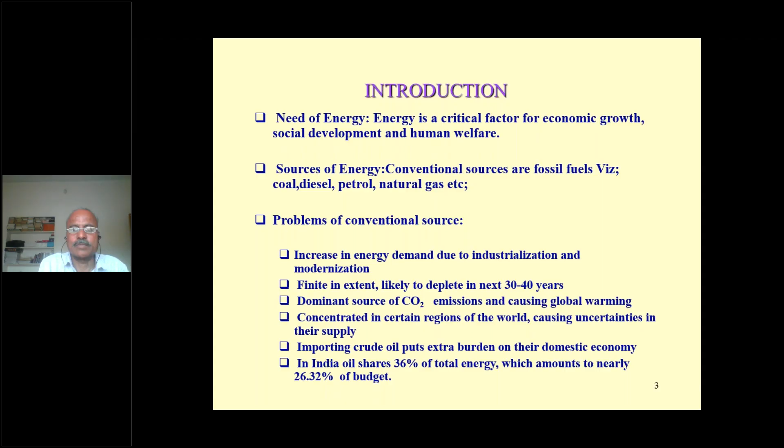The solution for this is to develop suitable alternate liquid fuels of bio origin. To develop these liquid fuels, a considerable amount of work has already been done in this field. Among them, the first one is alcohol, methanol and ethanol, which can be used as alternate fuels. These can be mixed with either diesel or petrol, and we can use them. But the problem with alcohol is that it emits toxic aldehydes and ketones.

Another is biomass and biogas, and it depends on green energy. Another green energy is vegetable oils. Vegetable oils, in the sense, the oils which are extracted from oil vegetable seeds, can be used as alternate fuels. Among these, the first to experiment were Barsic and Humake, who used untreated vegetable oils, peanut oil, and many other oils. They used them and tested them on the engine successfully.

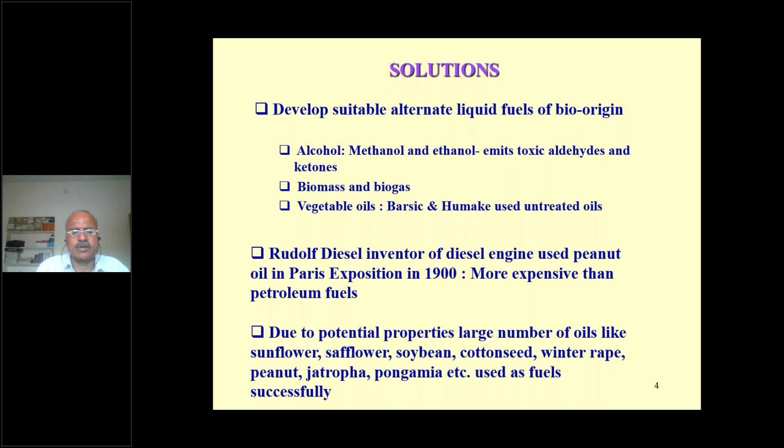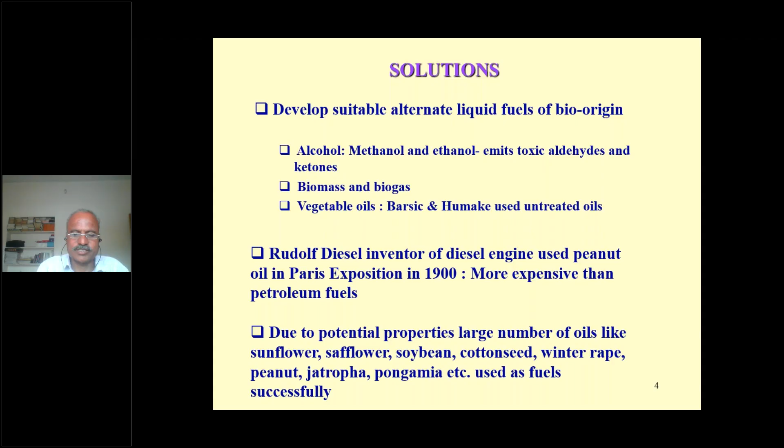And if you go way back to the inventor of the diesel engine, Rudolf Diesel, he used peanut oil in the Paris exposition in 1900. At that time it was actually more expensive than petroleum fuel, but his first exhibit was done using peanut oil. These vegetable oils have very potential properties; oils like sunflower, safflower, soybean, cottonseed, winter rape, peanut, jatropha, pongamia, etc., have been used as fuels successfully.

Historical background. As I already said, Rudolf Diesel in 1912 at the Engineering Society, St. Louis, Missouri, used this and presented it. In 1956, the USDA Research Service examined 8000 such species for oil seeds; several hundred undeveloped species contain more than 40% oil. In 1981, vegetable oil field tests were done on 5 different vehicles in Brazil, and the common things seen with the use of these vegetable oils are carbon deposit buildup, nozzle clogging, poor durability, sticking of the piston rings, and lower thermal efficiency. These are the problems that occurred while using vegetable oils.

To avoid this, the oil shall be converted into biodiesel. It means whatever fats are there in the vegetable oils shall be removed, and the vegetable oil after removing the fats is called biodiesel or esterified oil. Biodiesel is made from neat vegetable oil by transesterification. Using this transesterification process, we can convert vegetable oil into its respective biodiesel. Other methods are dilution, microemulsification, and pyrolysis. These are the different methods by which they can be converted into biodiesel.

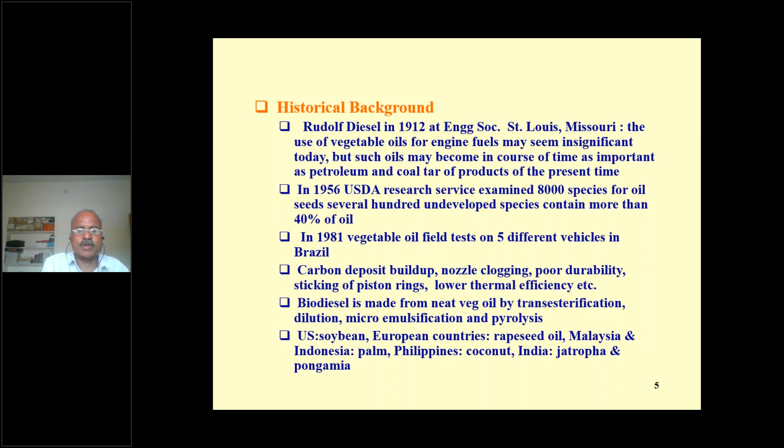In the US soybean, in European countries rapeseed oil, in Malaysia and Indonesia palm oil, in the Philippines coconut, and in India jatropha and pongamia are popular vegetable oils. India is a major oil seeds producer in the world. In the 10th plan, the Government of India outlined 5 million hectares for jatropha. They identified 200 districts in 9 states and rupees 1,496 crores to create 127.6 million person-days of work.

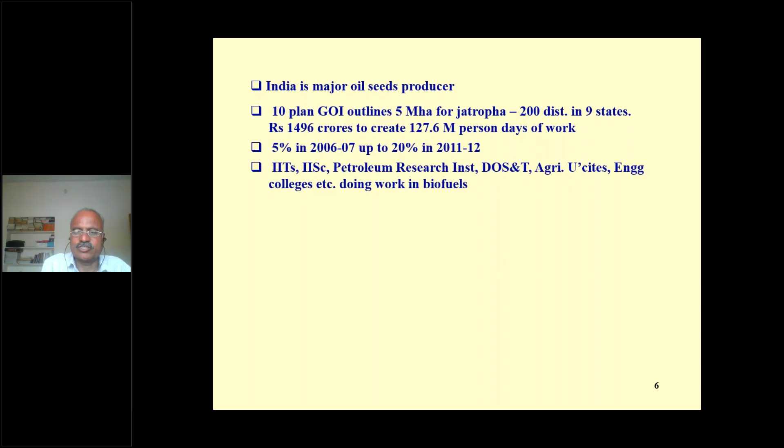In 2011-12, 5 to 20% biodiesel was used, and now the percentage of biodiesel used has increased. In India, many IITs, IISc, petroleum research institutes, the Department of Science and Technology, agricultural universities, engineering colleges, etc., are doing work on these biofuels.

Vegetable oils. Vegetable oils and fats are water insoluble hydrophobic substances composed of fatty esters and glycerol. Carbon chain length and number of unsaturated bonds vary. Triglyceride molecular weight is 800 to 900, 4 times larger than typical diesel. Oxygen molecules are present in the vegetable oil. Vegetable oils have high viscosity and density and low volatility and calorific value. This is one of the reasons these vegetable oils cannot be used directly, because of very high viscosity.

The cetane number of vegetable oil is from 35 to 45. High carbon residue, high flash point. Having a higher flash point, 220 to 285 degrees Celsius, is an advantage, since the transportation fire hazard is less. The calorific value of vegetable oil is 88 to 94% of diesel, and it has low sulfur content. This is one of the advantages of these oils.

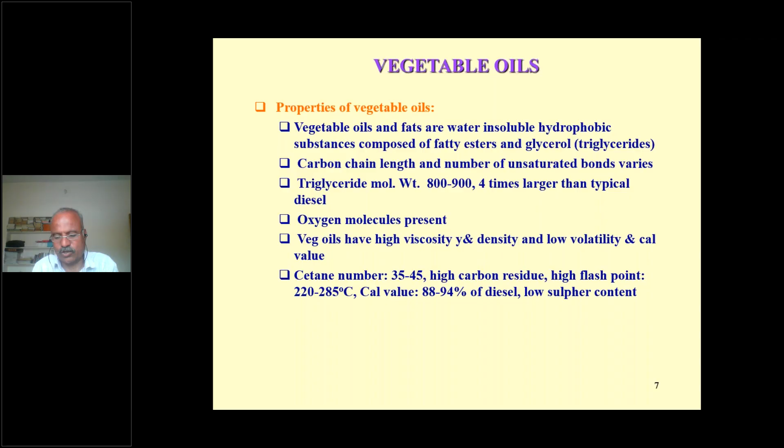But the problem with these oils is that diesel has a chain length of 11 to 13, while vegetable oil has 18, a polystructure, and high viscosity. The problems associated with using neat vegetable oil directly are nozzle choking, engine deposits, ring sticking, scuffing of the engine cylinder liner, injection nozzle failure, lube oil dilution, etc. Brake thermal efficiency is lower, brake specific fuel consumption is higher, and exhaust emissions, smoke, carbon monoxide, and unburnt hydrocarbons are higher. Reasons: large droplet sizes, low volatility, short penetration, chemical properties.

Then we actually need modification of these oils. Modification is done by transesterification, cracking or pyrolysis, and hydrogenation to reduce polymerization. Among these, transesterification is the most popular method, where the vegetable oil is directly converted into biodiesel.

And while doing experimentation, or if you are doing PhD research work in the field of biodiesels, what are the standards we use? IS 1448 standards are used for the measurement of their properties. For example, a hydrometer is used for density, a bomb calorimeter for determination of calorific value, a Redwood viscometer for viscosity, and Abel's apparatus for flash point and fire point, and all these conform to IS 1448.

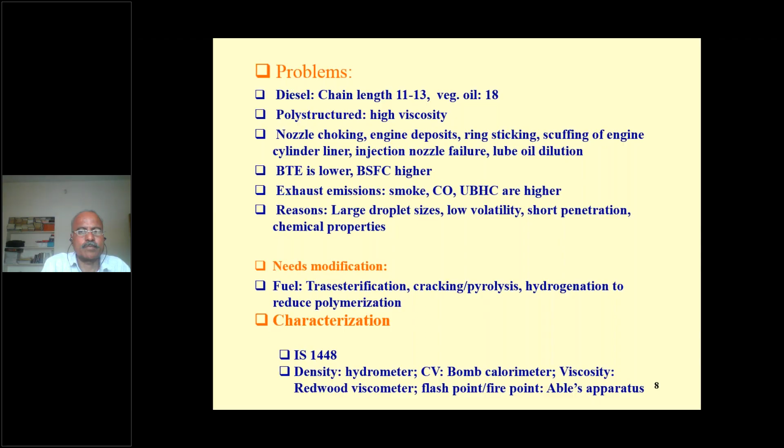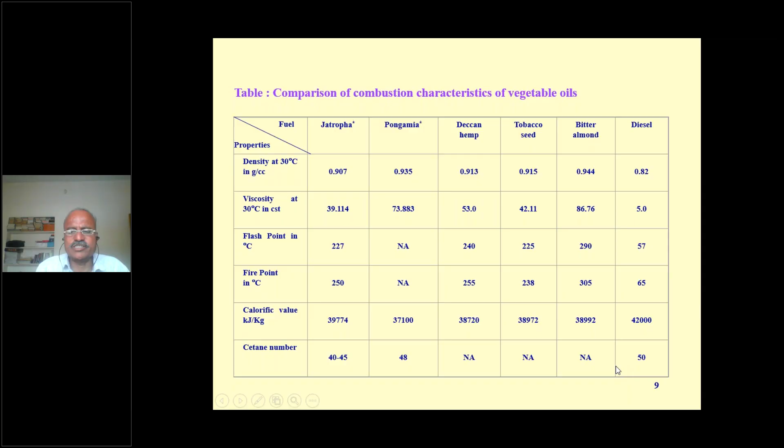We need a viscosity of around 5, but if you look at this, it is 7 to 8 times greater than diesel for all vegetable oils. Flash point is 227 versus 57 for diesel. The fire point is 65, while all these are nearly 250, on average 200 degrees Celsius. Calorific value of diesel is 42,000 kilojoules per kg, and these have a lower calorific value, around 85 to 88 percent. Cetane number is 50, and for these it is 45, 48, 45, 40. These are the ranges we have specified.

Then we have to test to determine the performance of all these oils on an engine. For the sample, I have taken up Deccan hemp oil. Deccan hemp is well grown in the region of Hyderabad, Karnataka, North Karnataka. Deccan hemp is more popular, and it is a shrub. It is also used as a vegetable. And in Kannada they call it pundi. This Deccan hemp oil we have used for investigation.

The engine used is a Kirloskar oil engine TV-SR2, a naturally aspirated single cylinder direct injection diesel engine, with rated power of 3.68 kilowatt. The speed is 1500 RPM. All the other specifications are mentioned here.

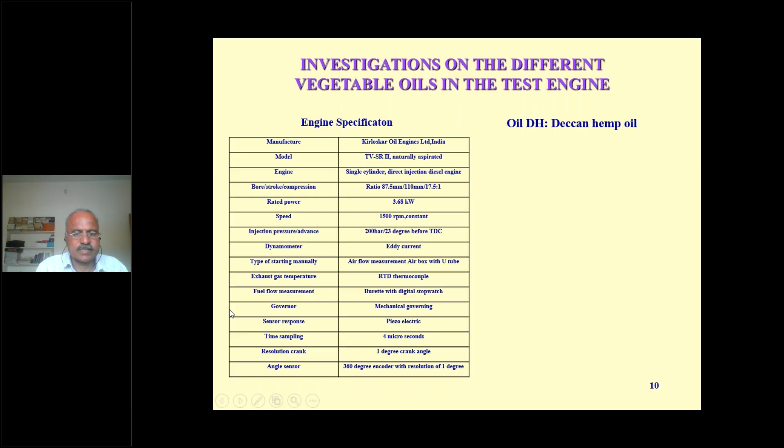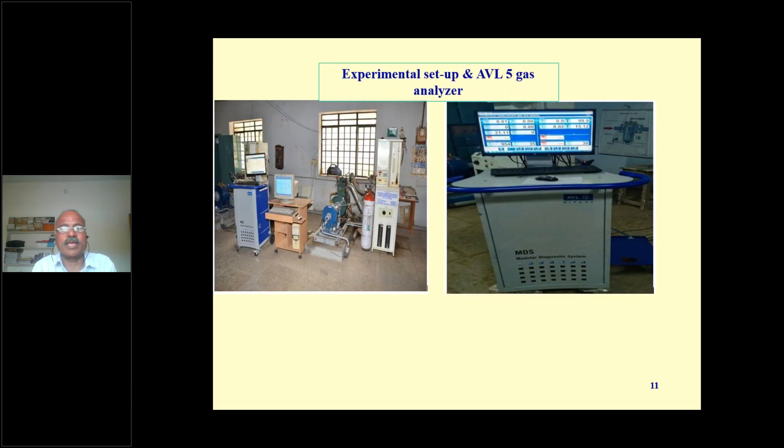Experimental setup. This is our experimental setup, and this is a 5-gas analyzer, AVL 5-gas analyzer. This is available in our laboratory of internal combustion engineering, and we procured it under TEQIP, the second phase. It measures all 5 gases, and carbon dioxide is also included. The cost of this equipment is 15 lakhs. AVL 5-gas analyzer.

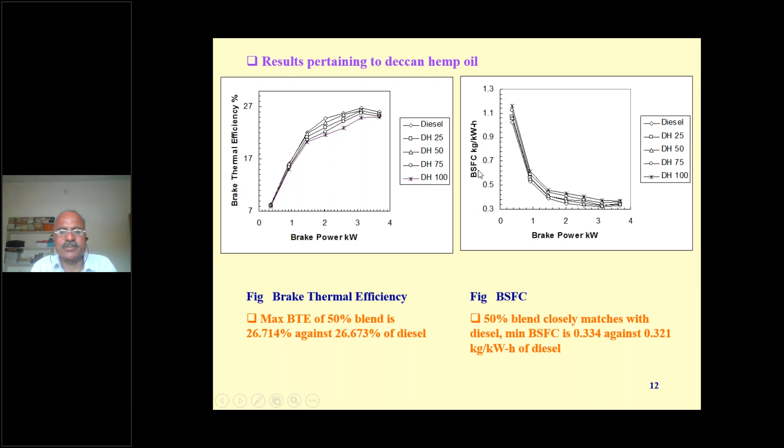Another is the brake specific energy consumption. Here actually we have gone to the brake specific fuel consumption. This is the quantity in kg per kilowatt hour, and kg per kilowatt hour keeps on changing because of the density difference of the vegetable oils compared to the diesel.

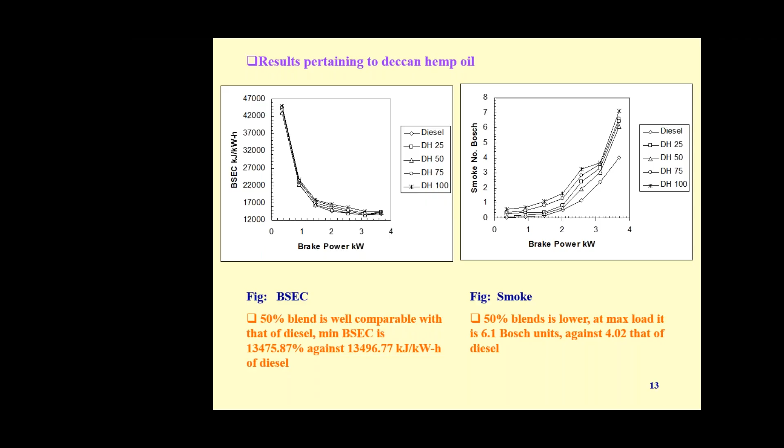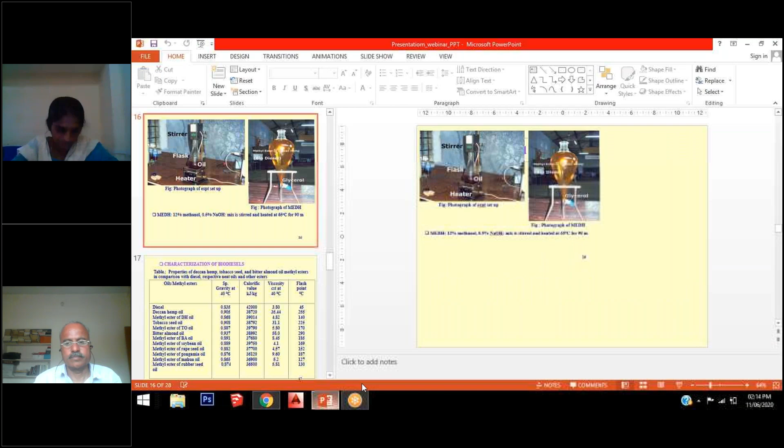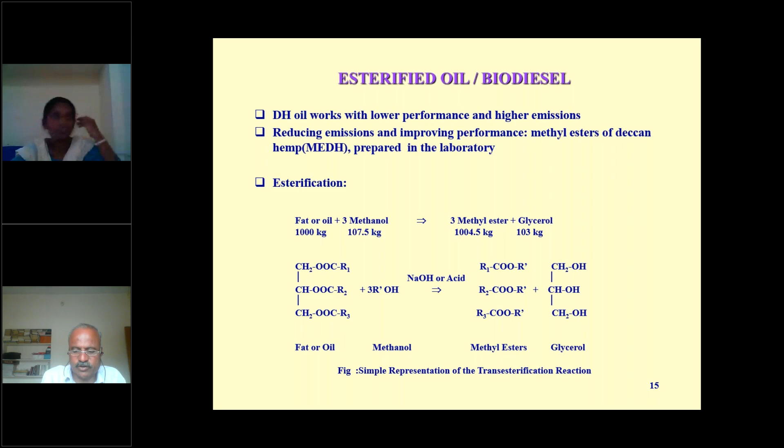Esterification. Sorry for the interruption. In esterification, 3 moles of the methyl ester we get, and 1 mole of glycerol. And this is an experimental setup created in our lab. Oil is taken 20%, 12% of methanol, 0.5% of NaOH. The mix is stirred and heated at 60 for 90 minutes.

It is heated for 1.5 hours, and then it is taken to a flask like this. In the flask we keep it overnight, 7 to 8 hours. Then at the bottom glycerol will be collected, and we have to remove it. Then the methyl ester of the Deccan hemp oil you can collect at the top, and you take it, wash and heat it to remove the moisture content. Then that oil, the biodiesel, is available for our experimentation.

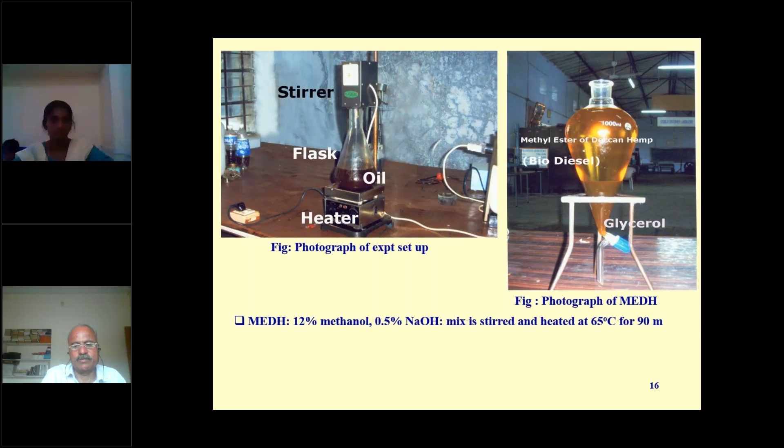And again, the characterization we have to do: the specific gravity, calorific value, viscosity, flash point, and all other thermophysical properties we have to determine.

Any problem? No, sir, you can continue.

Properties of Deccan hemp, tobacco seed and the bitter almond oil methyl esters in comparison with the diesel, respective neat oils and other esters. You see the Deccan hemp oil and the methyl ester of Deccan hemp oil. The specific gravity has reduced from 0.905 to 0.868, and the calorific value is also improved, 38,720 kilojoules to 39.014.

And one of the best things is this property, a very important property in vegetable oil. 35.44 centistokes viscosity has reduced to 4.82. This conforms to the viscosity needed for firing a diesel engine. The flash point 255 is now 140. These are the improvements we see in the biodiesel. Now the biodiesel is very close to diesel, and all these potential properties are very close to the diesel, so this can be used in a diesel engine.

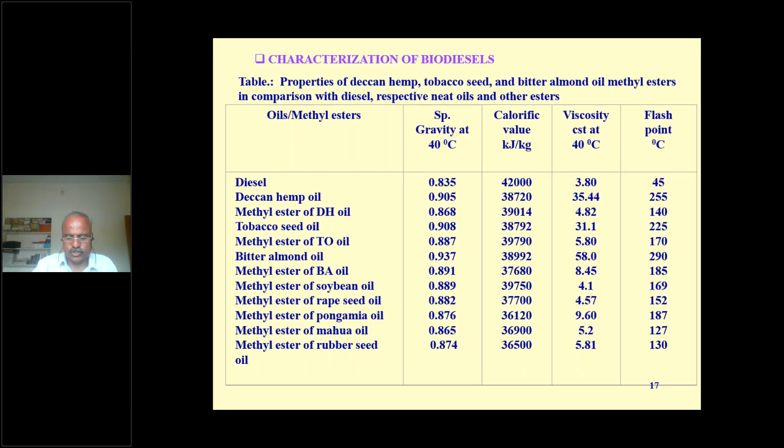Now we'll see results pertaining to methyl ester of Deccan hemp oil. We have tested it on this engine. Earlier we had taken up the neat oil, Deccan hemp 100%. This is the diesel, this is the biodiesel of Deccan hemp. We can see the improvement over the neat vegetable oil in performance, because it is very close to the diesel, and at some times it is better than the diesel, or on par with the diesel.

We can see that as the load increases, the Deccan hemp oil biodiesel is performing better. The reason is, first, its properties are very close to the diesel. The second thing is that these biodiesels have oxygen inbuilt; there is some percentage of oxygen in the fuel itself. That is why at higher load this performs better by giving better combustion. And this is reciprocal, as we know, of brake thermal efficiency: the brake specific fuel consumption is better.

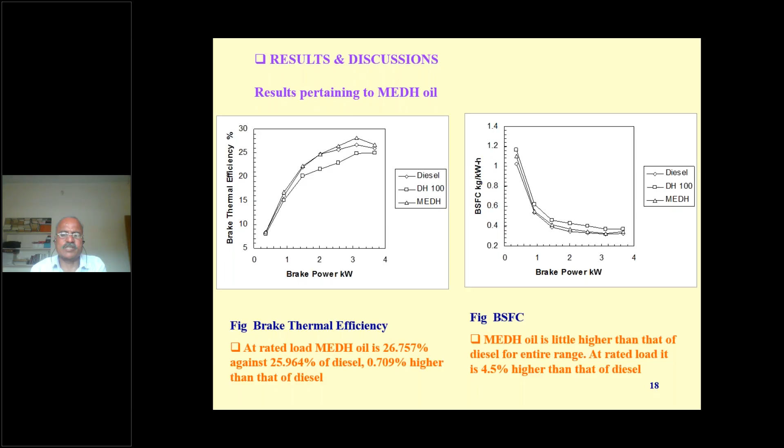The methyl ester of Deccan hemp oil is a little higher than the diesel for the entire range in brake specific fuel consumption. At rated load, it is 4.5% higher than that of the diesel. It's 4.5, 2%, 3%. It's not an exact value because we run the engine 2 times, 3 times. Values we have to present, but it depends on many other factors.

If it comes to the best oil, results pertaining to the biodiesel of the Deccan hemp, brake specific energy consumption, we have seen it. The specific energy consumption gives a very close match with the diesel. And the smoke emission of the biodiesel is lower compared to the diesel. This is the diesel, this is the Deccan hemp, and this one is the neat vegetable oil.

Now here, if you compare this one and this one, you can see a lot of smoke emission has been reduced. The only reason is that the combustion properties of the fuel have been improved in the biodiesel. We can see this up to 60% of the load also here. Then both are going together, the diesel as well as this one. After that, this is still a lower smoke emission.

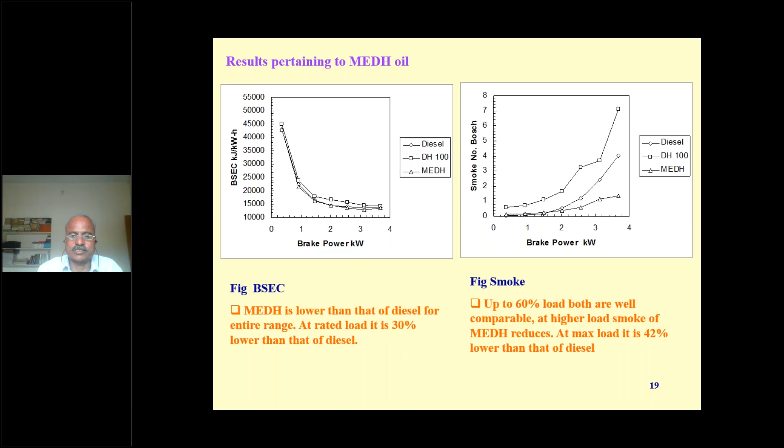This is one of the important factors: all biodiesels have inbuilt oxygen in the fuel. The oxygen content in the fuel gives better combustion. But this has some other effect. The other effect is that if the oxygen content is very high in the fuel itself, then it emits a lot of NOx, nitrogen oxides. Later I will explain that.

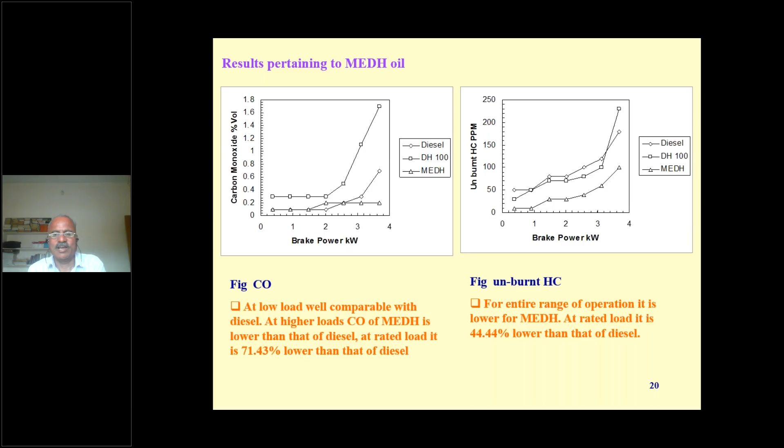This is carbon monoxide. We can see that there is a little reduction comparing to the neat oil. This is the vegetable oil, this is the biodiesel, and this one is the diesel. And if you come to the unburnt hydrocarbon, the biodiesel performs much better because of the oxygen content in the fuel itself. Two things happen with the inbuilt oxygen content in the biodiesel. One is the combustion begins early, and it supports efficient combustion.

Next is the exhaust gas temperature. This is the average exhaust gas temperature of all these oils; the diesel and the methyl esters are almost all the same.

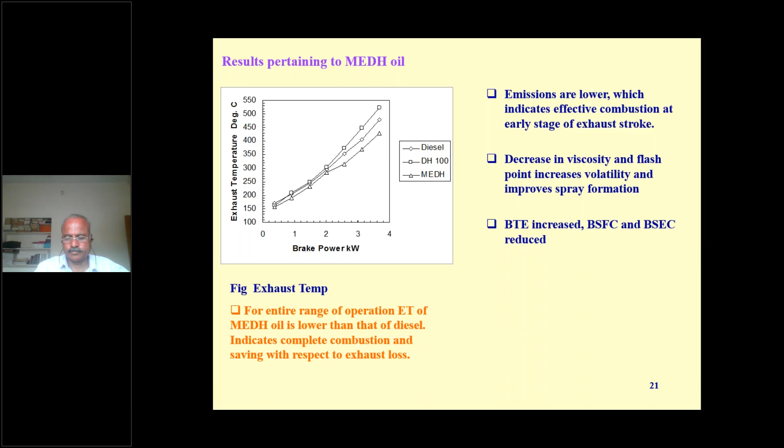The conclusions on the use of Deccan hemp biodiesel: methyl esters of the Deccan hemp oil were obtained successfully by transesterification. Esterification reduced the viscosity and flash point of the oil under test. Density, viscosity, and flash point of methyl ester of Deccan hemp oil are higher and the calorific value is lower than that of the diesel. The properties of all oils under test are well comparable with those of soybean, rapeseed, pongamia, mahua, and rubber seed.

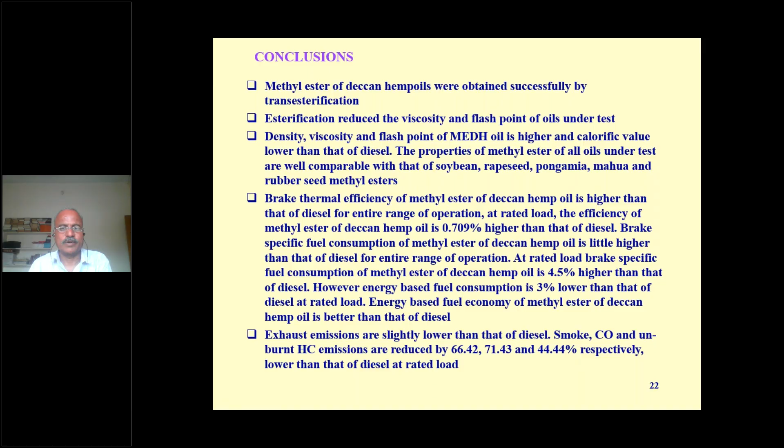Another one is the combustion characteristics. We didn't conduct combustion characteristics on the Deccan hemp oil earlier, so we have taken experimental readings of some other work. Here we have cotton seed oil biodiesel, a biodiesel made of cotton seed oil with diethyl ether as an additive. We added diethyl ether and tested the engine.

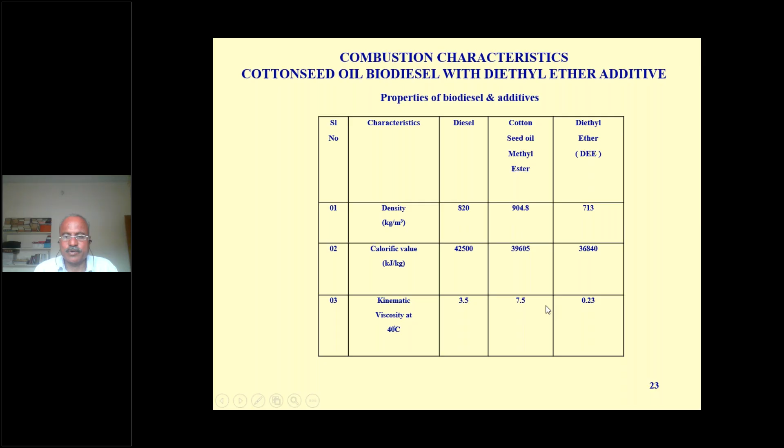The characteristics are there. Density: diesel 820, cotton seed oil methyl ester 904.8, diethyl ether 713. Calorific value: 42,500, 39,605. This is some other experiment, because the value of the diesel changes here, and diethyl ether 36,840. Kinematic viscosity 3.5, 7.5, and 0.23.

And all these combustion characteristics, performance characteristics and emission characteristics, we have seen, and now we see the combustion characteristics. The combustion characteristics depend on the variation of pressure inside the cylinder. This is one of the most important parameters to be considered.

The variation of pressure in the cylinder has to be recorded for about 100 cycles, or 50 cycles, and averaged for every one degree rotation of the crankshaft. We add up and average over 100 cycles, then take up those values.

From the variation of pressure, using the energy equation, applying the first law of thermodynamics to the combustion chamber, we get this equation: dQn by d-theta is equal to gamma by gamma minus 1, times p dv by d-theta, plus 1 by gamma minus 1, times v dp by d-theta.

Here v is the cylinder volume and p is the pressure. We need the variation of cylinder volume with crank angle, and the variation of pressure with crank angle. Pressure is measured along with the movement of the piston, so volume can also be determined. Once pressure and volume are measured, their derivatives can be easily determined and substituted in this equation.

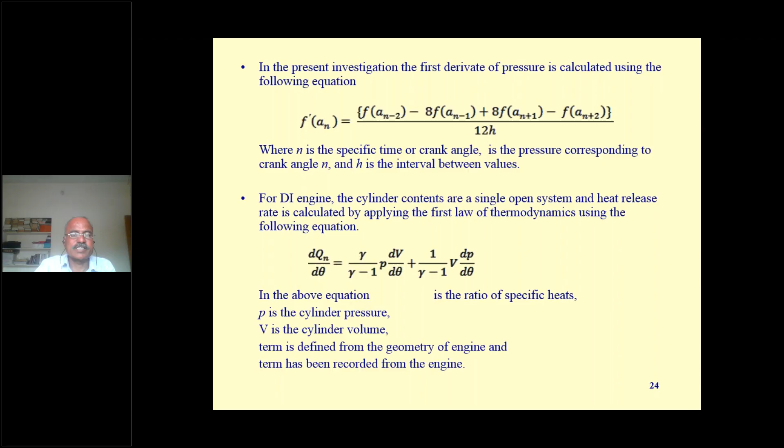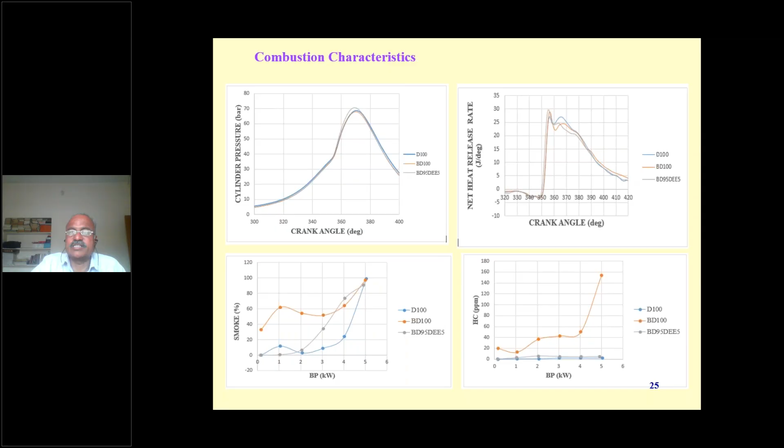We can see that using diethyl ether, there is an improvement in the combustion, and the heat release actually occurs very close to top dead center, giving better performance. There's also a smoke emissions effect by adding diethyl ether: this is shown for biodiesel, this is for diesel, and using diethyl ether falls in between.

Hydrocarbon emissions in the biodiesel are much higher. By adding diethyl ether, the hydrocarbon emissions reduce.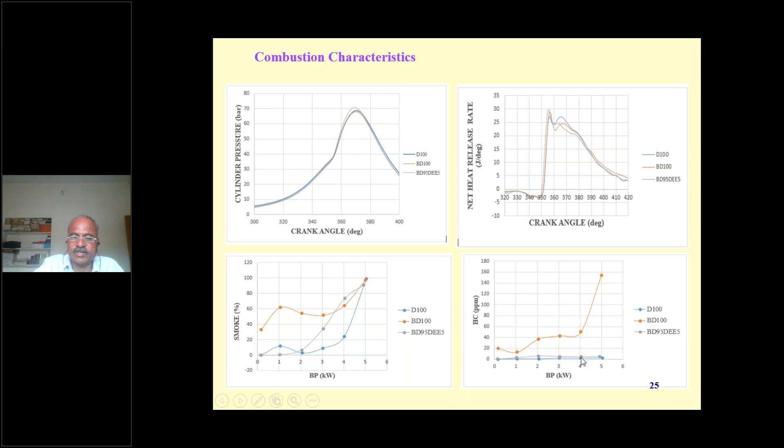All these are very important factors. As air is used in the combustion chamber, it splits into oxygen and nitrogen, and reassociates, mixing with the oxygen available in the fuel, because the fuel carries inbuilt oxygen that readily mixes with nitrogen, forming NOx. This is the major disadvantage of biodiesel.

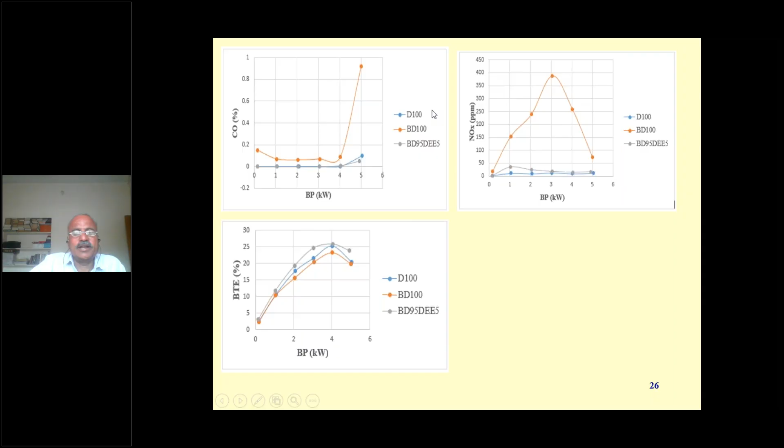In this webinar class, we have reviewed the performance characteristics, what things need to be measured, the emission characteristics, and the combustion characteristics and their significance for diesel engines running with vegetable oil and their biodiesels.

In total, I want to say that using neat vegetable oil in a diesel engine has got lower thermal performance and higher emissions. To improve the performance and reduce the emissions, we have gone for converting it into methyl esters, or biodiesel. Biodiesels then give well comparable results to diesel in an unmodified engine.

Especially the performance and emissions are comparable. Because of that, it is proposed by government organizations that 20% biodiesel can be added in a diesel engine and the engine can be run with this blend.

But as time goes, we have to move into an era of directly using alternate fuels, because diesel will not be available in future. All these fuels are called green fuels, and carbon dioxide is not taken into account in the emissions analysis of these diesel engines, because carbon dioxide goes back into nature's cycle: trees absorb it, vegetables convert it through photosynthesis into oil seeds, which we then crush, and the carbon dioxide is emitted again in that natural cycle. That's why carbon dioxide emission is not counted for vegetable oils.

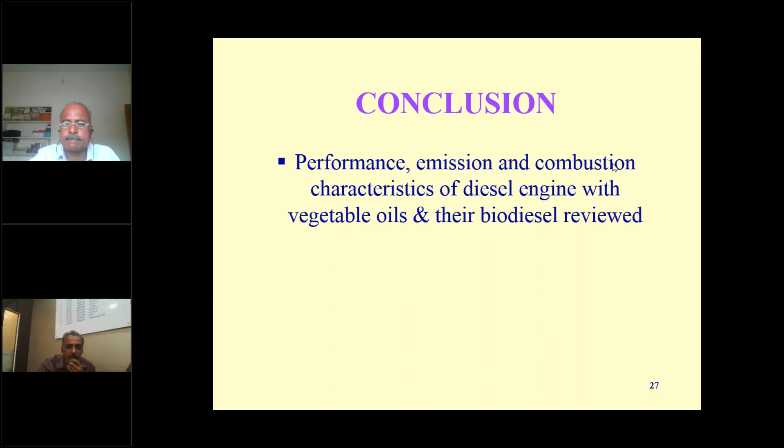I'm unable to see it. Sir, shall I read it, sir?

Please read. The major question that I come across every time when we offer a project on biofuel is: in the changing scenario of changing trends in IC engine technologies and developments in the automobile industry, how does the research in the biofuel field stand? Question from Hemant Kumar, sir.

Hello, Hemant. Yes, yes, come to this one. It's a nice question you have.

We are talking of biodiesel to use after 50 years. As time goes and oil depletes, diesel, petrol, natural gas all get depleted. This is one of the options available. At present this may not be very feasible, but as time goes, definitely this will become one of the important alternatives. The reason is that we have to keep developing vegetable oils and seeds, especially non-edible vegetable oils, which we have to grow and convert into biodiesel. In the nation, at a number of places, biodiesel is produced on a large scale, and that biodiesel is even used by KSRTC, the state road transport sectors, with 25%, 20% addition in their projects. Definitely this has got a better need in the future.

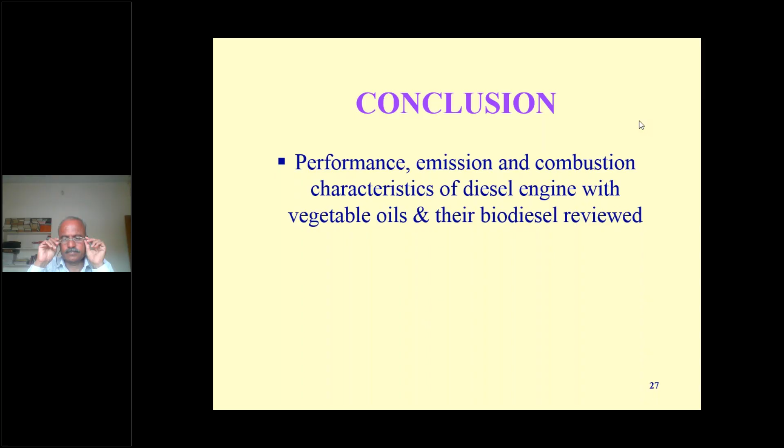Thank you, sir. And last question, sir, I won't take more time. My request to the organizers or the speakers: in many of the colleges, we do not have any equipment to do experimentation. We want to check some of the parameters if we are using these biodiesel biofuels. Many students in the final year do the project very well, but they don't have any facility at their colleges or in the local area. True.

Then it depends on the college. In one college, they are experts in fluid dynamics, with PhD professors, and they conduct experiments on fluids only. In other colleges, IC engines, alternate fuels, like that. As far as IC engines are concerned, our college is one of the best in this state, with all biodiesel facilities: testing, production of biodiesel, running the engine, and finding all emissions with a gas analyzer.

We have well-instrumented IC engines, single cylinder, 4-cylinder, multi-cylinder engines. If anybody is interested, write to us, and we will allow you to come and conduct the experiment in our college.